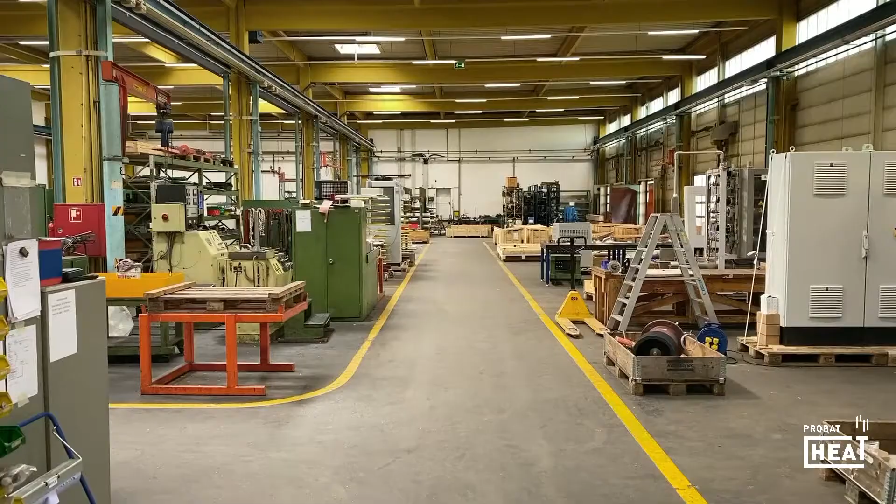This year we are going to talk about our main topics like sustainability and digitalization, but of course topics that drive the coffee world. For example, the power of grinding. Therefore, we are today at Baumeister in Hamburg-Norderstedt, which is a member of the PROBAT group and are experts in grinding technology. So, over there are Thilo and Dietmar, who are supporting during the session and are the specialists and experts, but they will introduce themselves.

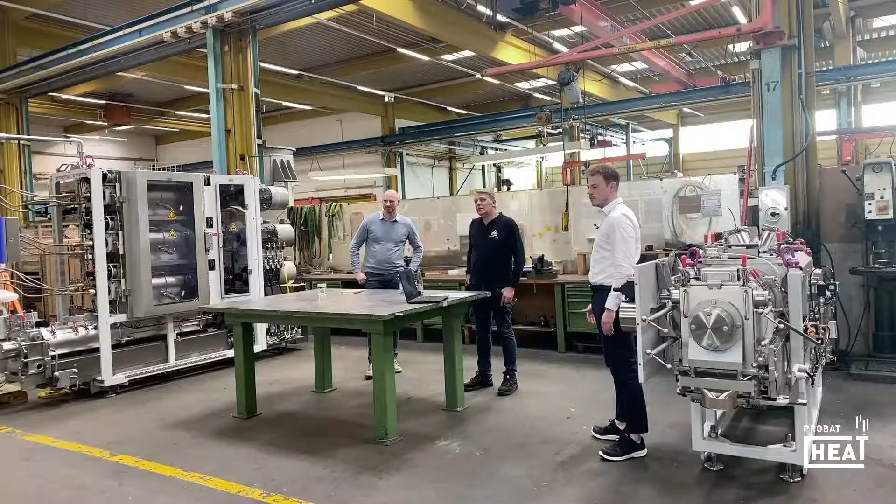Yeah, hi folks, I'm Dietmar. And I'm a member of the PROBAT R&D team in Emmerich, where we do the grinding trials together with our customers on our pilot plant. Welcome to Baumeister. My name is Thilo Lechner and I'm the Chief Design Engineer from the Roll Grinder division here in Norderstedt. It's near Hamburg. And the Baumeister company is a member of the PROBAT group since 1985, and a manufacturer of many types of grinders and mills.

And the main types of grinders and mills are, for example, the universal turbo mill used for sugar, for spices, for starch, lactose, limestone, gypsum and many more. But most are used for sugar. And furthermore, we have gap mills for products with soft and medium hard materials, used when an even finer product is required than by the turbo mill. The universal turbo mill and the gap mill are high-speed rotation mills up to 120 meters per second, and they grind by a crushing impact process.

What have we more? We have classifiers to separate the coarse and the fine particles. We have beater blade mills for products with a high fat content. We have big roll flakers for the food oil industries, for oil seeds, for example, soya beans or rapeseed, and that is necessary for the oil extraction afterwards. We have different kinds of roll grinders for products such as fertilizer urea or superabsorbent polymer, short SAP. It's a granulate to absorb moisture. You find it, for example, in diapers.

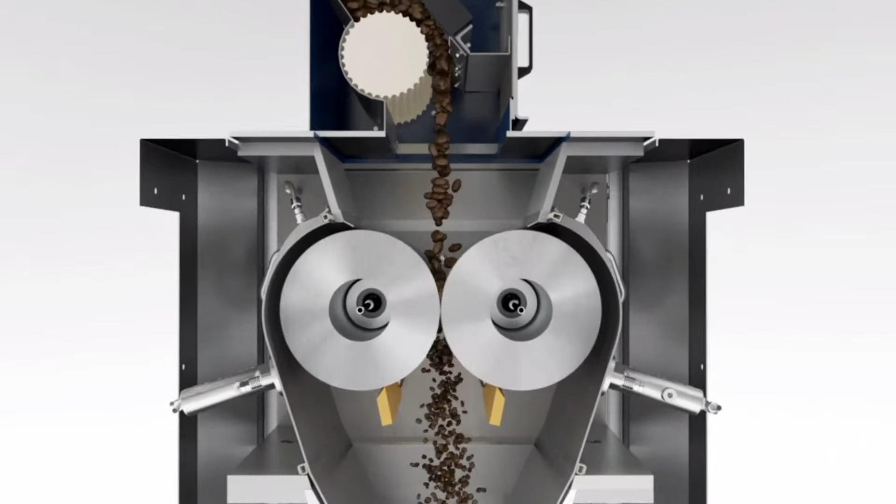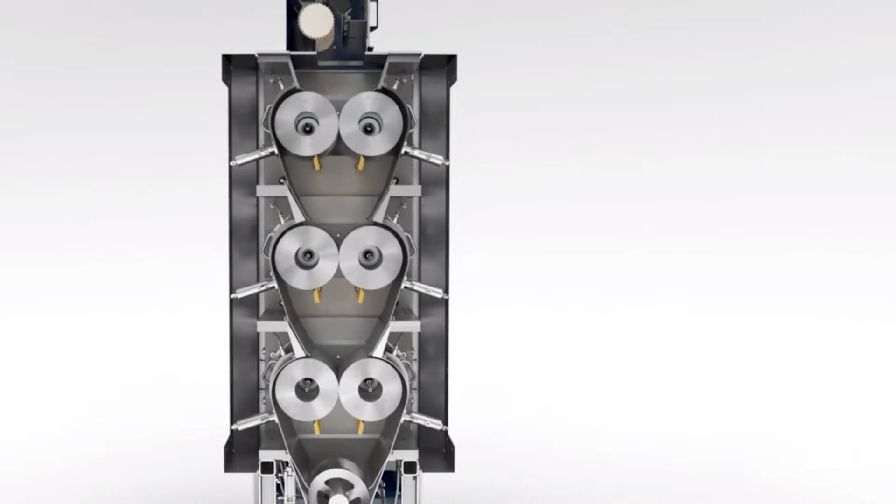Okay guys, let's have a closer look at the machine itself. So here we have a 3-stage roller grinder for coffee grinding. On the top we see the feeder where the coffee is provided to the grinder, passes the 3 different stages and finally gets out at the superfine stage. Further we will go to the drives. Let's have a closer look at that one.

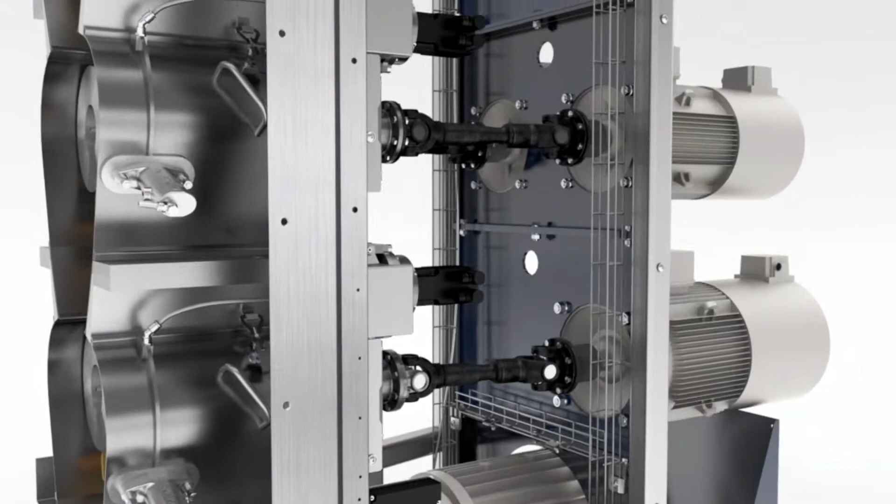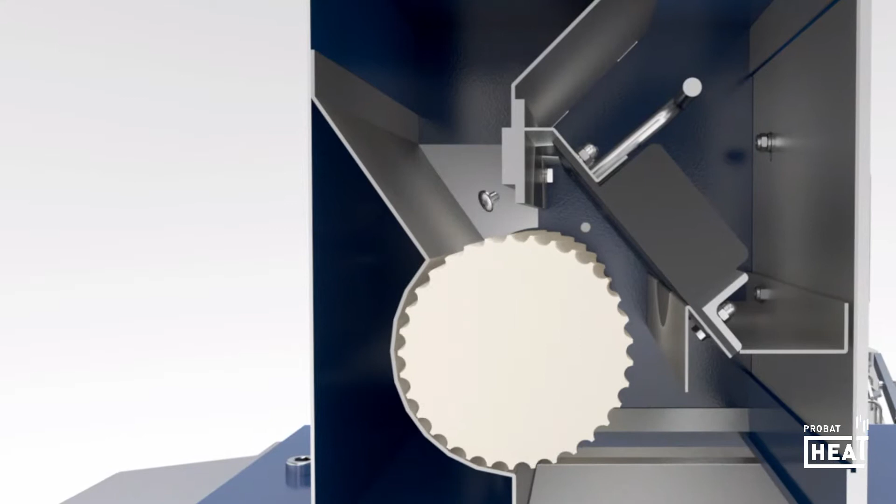There you can see that each roller can have a drive. I have to say can, because the drive configuration depends on the customer's needs. So you can have 1 drive per roll, or you can have 1 drive per section, and then the transmission is with sprockets. Furthermore, as a standard for this type of grinder, we have added a magnetic separator that allows us to extract foreign particles.

Thank you, Dietmar. That was, I think, a good overview of the grinder itself and the technology behind it with the coffee. Now we would like to dive a little bit deeper into the technology. I collected some questions from the market and the customers. The first one is, a lot of roasteries are increasing their output when it comes to ground coffee, and they of course have PROBAT mills, for example. Do they have to buy a new mill if they want to increase their output, or are there any other opportunities to do that?

Well, all the grinders of PROBAT are equipped with a feeding device too. That is a star valve with a frequency-controlled drive, and that allows you to adjust the capacity. Higher speed is more capacity and so on. Certainly the maximum capacity depends on the respective grinder size, and a finer grind has a lower output than a coarser grind. In case a higher output is desired, a third stage can be a solution for a two-stage grinder. But if you are at the maximum for the grinder, then you have to integrate a bigger grinder for sure. I understand that.

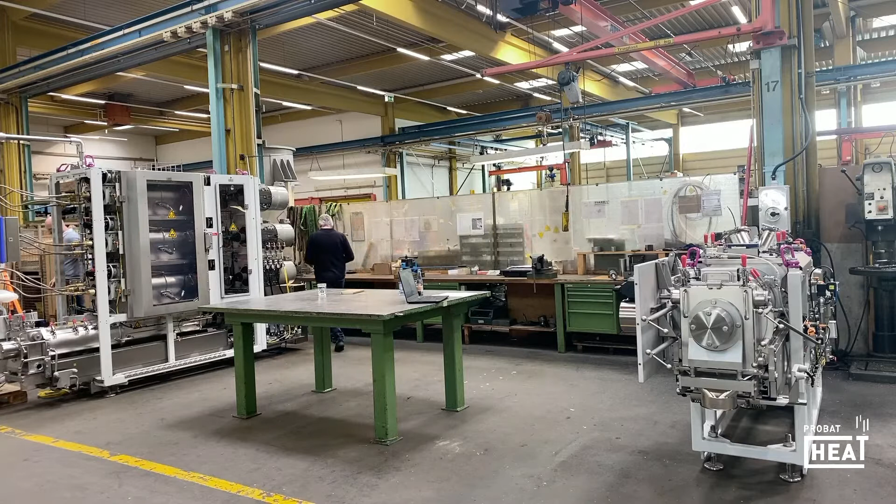Here we are. This is the grinder UW900.3. It is not fully mounted, some covers are left, but it's a very fully equipped machine. We have additional customized requests, special requests, and we want to show you some of these highlights today. The first I want to show you is in the grinder stages.

There the rolls are located, and underneath there's a scraper blade, and the scraper blades are normally there to clean the roll during running. But in this case we designed a removable scraper blade, manual, without any tools. That was not such an easy task because the scrapers must be very stable in the fixed position, and also very straight and accurate, without any play. And now I want to remove that and show you.

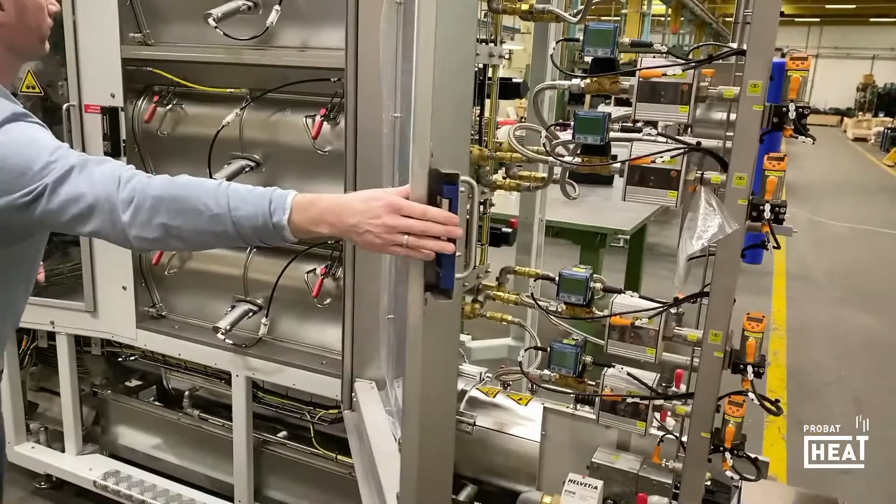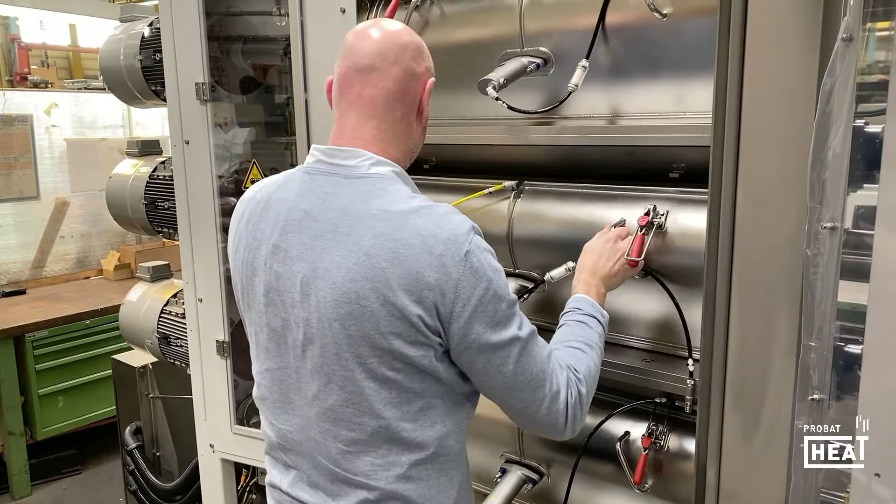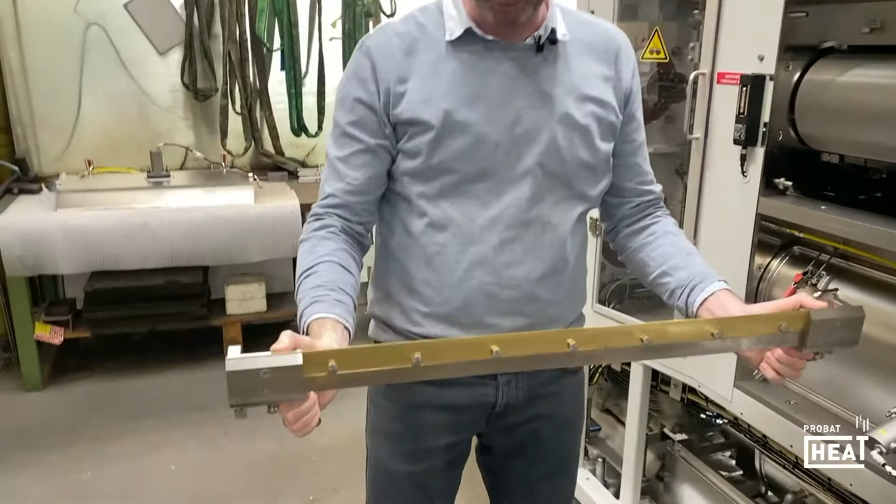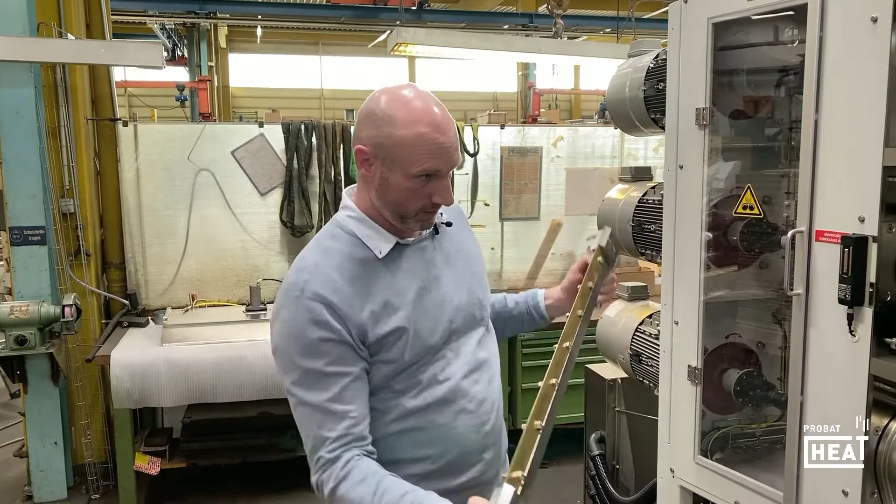First I will open one door. It's also easy without any tools, but that's not the topic I was talking about before. Underneath there are the scraper blades. Normally they are totally fixed. And then I can remove them. And here you see the knife, or the scraper blade. It's easy to handle. Very easy. And that is made for the cleaning process. It makes the cleaning process more comfortable because there are no spaces behind and it's easier to access.

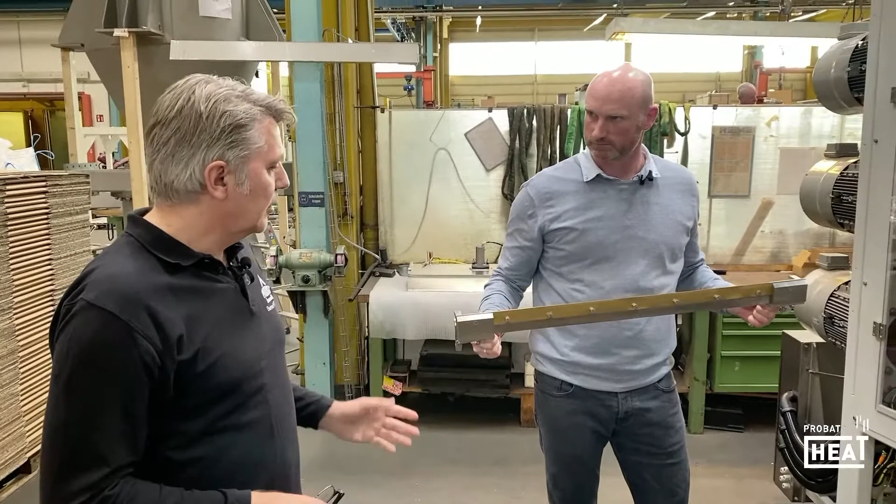Let me ask you one question. If you do that extraction very easily and quickly to clean, then you have to readjust the blade, I think? No. Not? Really? It is a totally fixed position without any play. You don't need to readjust it. It's an eccentric clamp. No readjusting. Oh, okay, that's pretty cool. It finds its totally accurate position back. Okay, wow. Impressive.

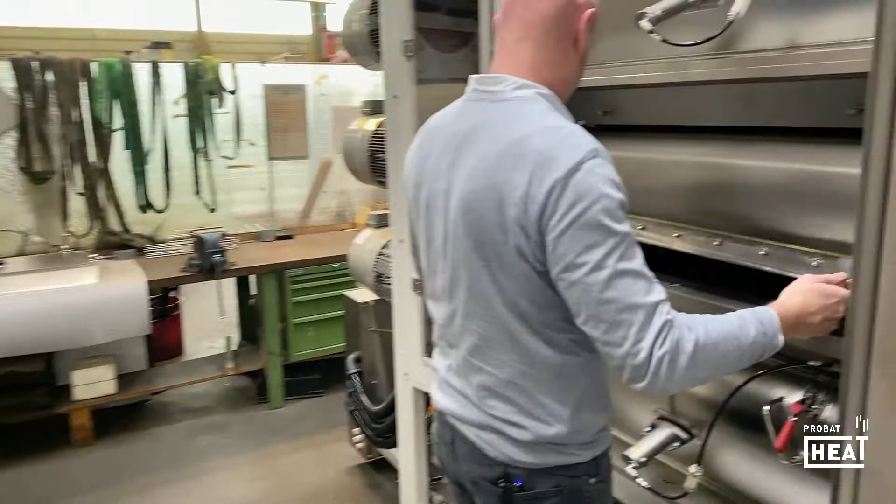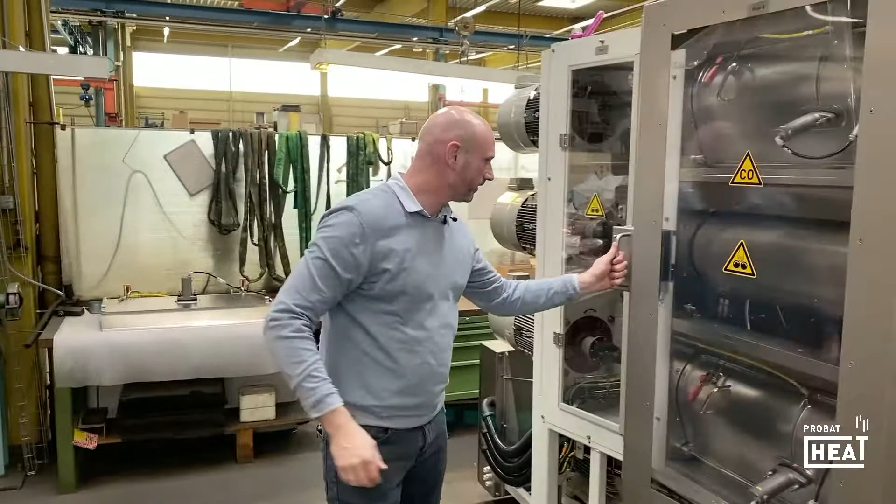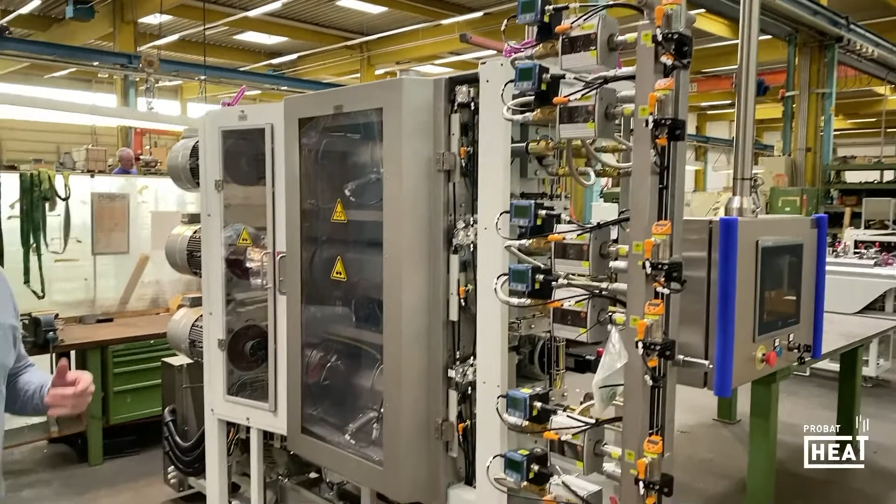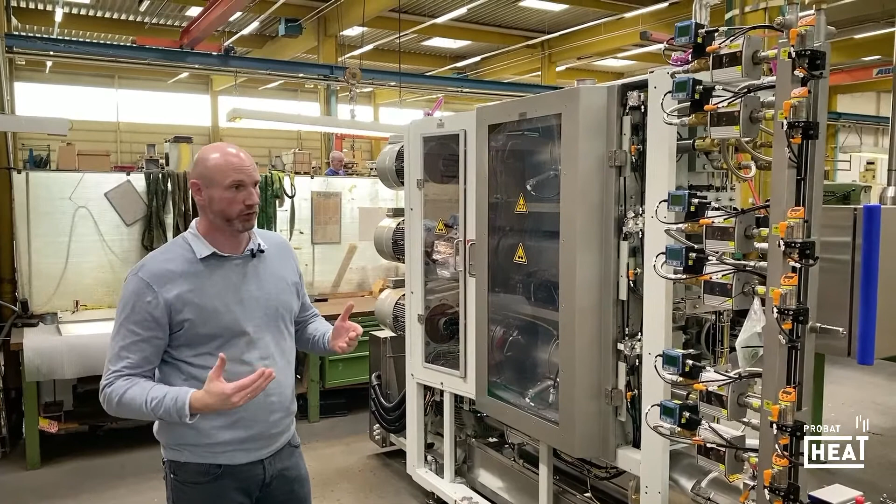Okay, the door closed. Come to the next, to the water cooling. Water cooling is for the rolls. That was about to separate the measurement, the water flow measurement, adjustment, as well as temperature recording for each individual roller. It was customer wish. Normally, standard was each stage, manually adjusted, and not electrical, and not each roll.

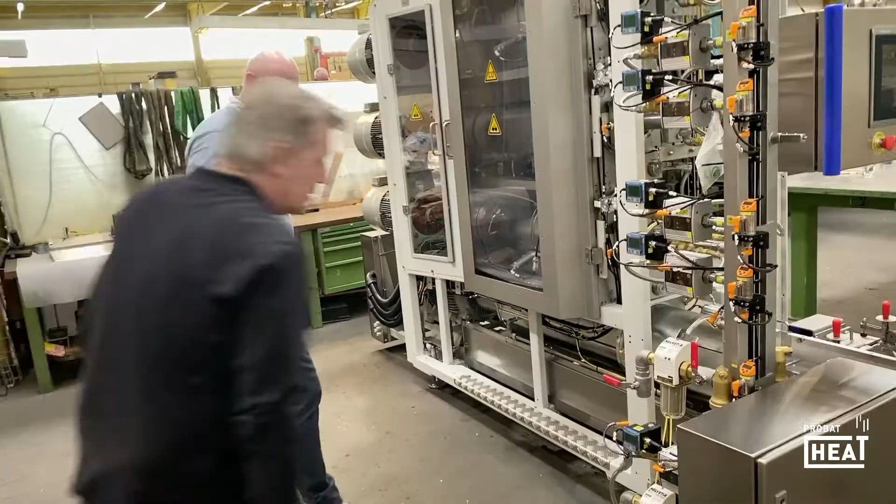It is an independent flow. So very special, let's say. Yeah, you see, it is very extensive equipment. High-end control. Cleaning the filter, you can do it during the run, during operation. You close the valves here and here, and then it flows to the bypass, and you can clean the filter without stopping the machine or the plant.

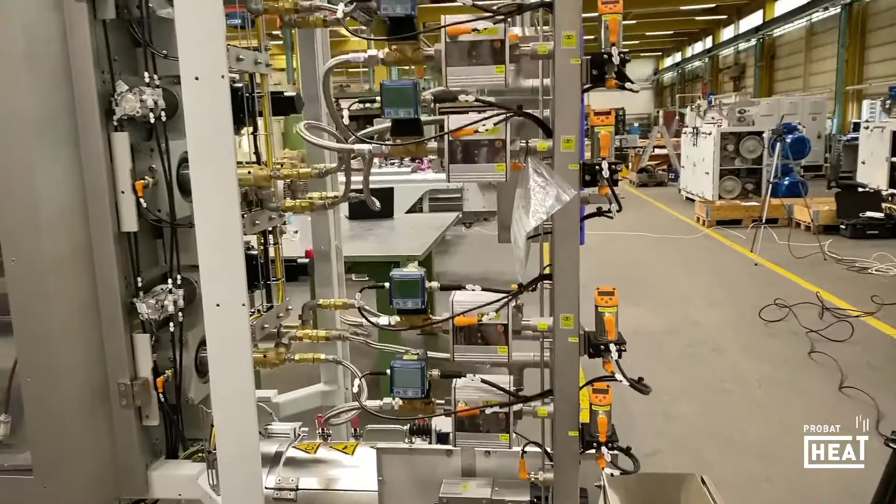Or the production. Great. What do you say if a customer asks me, is it a must-have, or what is the benefit for the customer? It's additional. The cooling of the rolls. The important thing is they are not cooling the coffee, it's cooling the elements, the components, for example bearings, and the inside of the rollers, and hold it stable without any thermal expansion. So it is protection for the equipment.

And in this case, the rollers have a differential speed ratio. When you switch, for example, the one is the faster roll, and you switch to the other as the faster roll, you can adjust the water flow more and less, accordingly to the speed of the rollers itself. And everything can be set at the controlling system or connected maybe to the recipe if it is necessary. So more monitoring and adjustments, a little customized tuning.

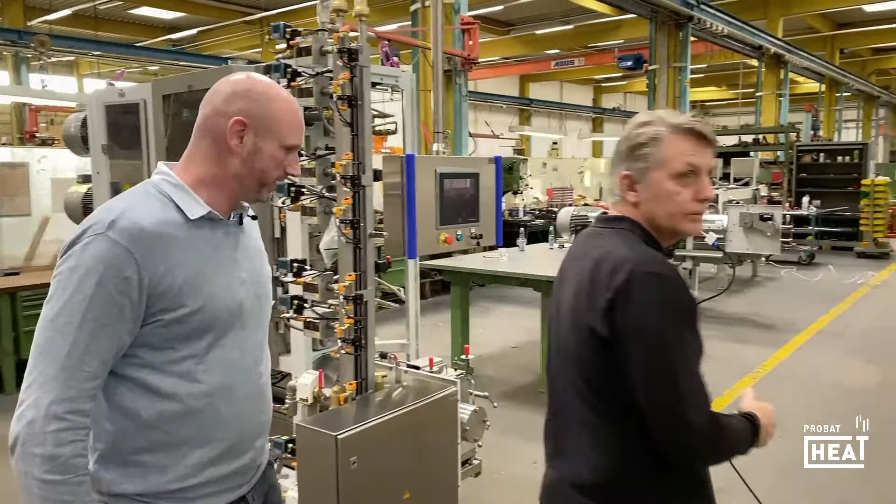Okay, very good. Okay, cool. Let's move over to the next. I want to show you something. Can you take it away? We come to the densifier. Sorry. Yeah. The densifier.

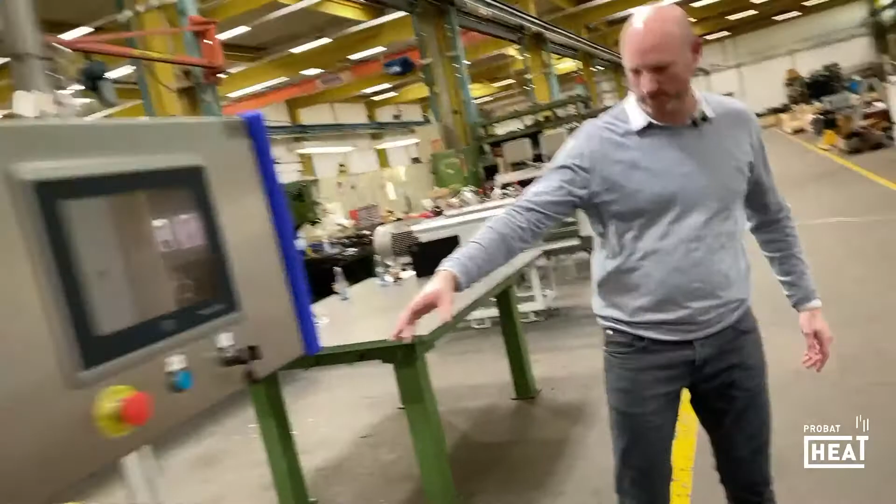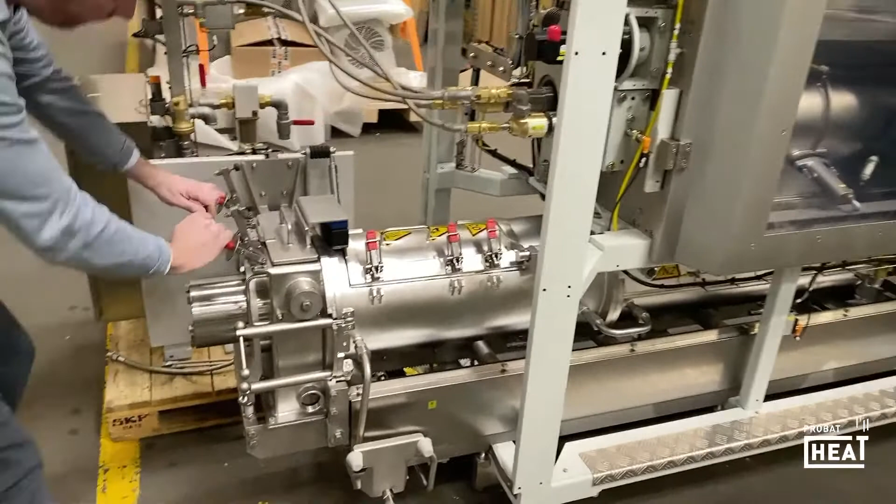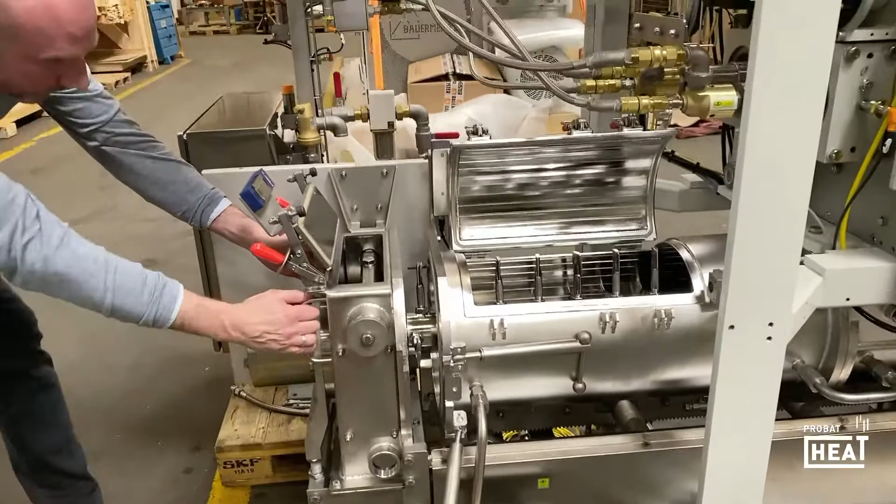Yeah, I like this one. I want to have it in Emmerich, in your R&D center. Can I take it? Yeah, you have a smaller grinder there. No problem. We can cut it out.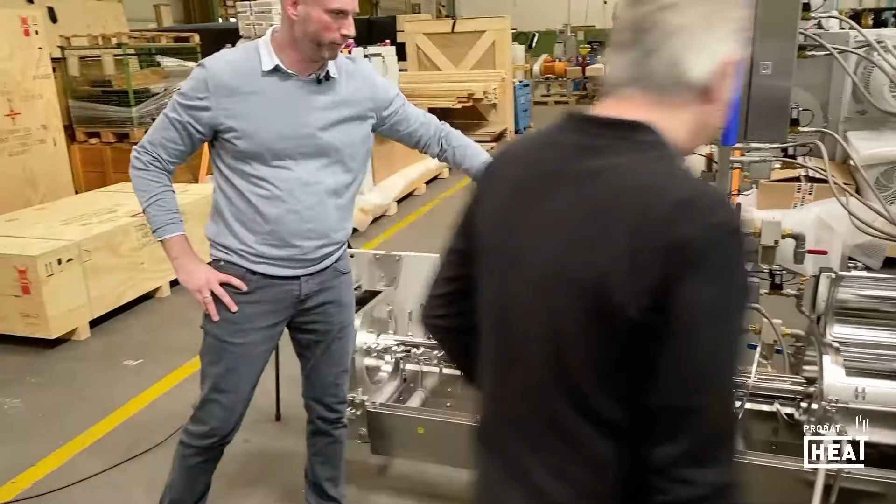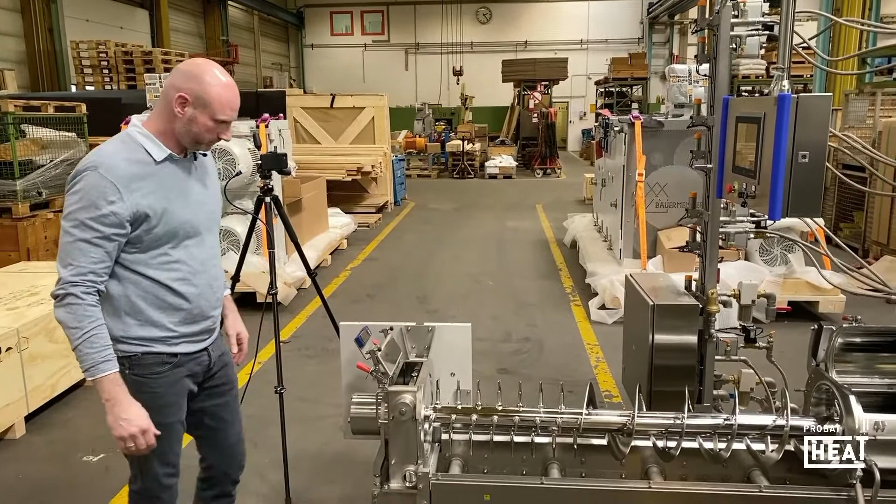That was very special, and it's easier to clean the internal rooms. Otherwise, you have to vacuum it here and here and here. It's possible, but this is a more comfortable thing. And is it adjustable afterwards, or is it only possible with a new grinder? It's just for a new grinder. It must be designed directly to the combination. It's not a retrofit.

Yeah, maybe. We have done it for one retrofit, another kind of grinder. I remember one thing. So it is possible. That is good news. But not for the total big grinder. It's limited to the 900 length. 900 length rolls, 900 millimeter.

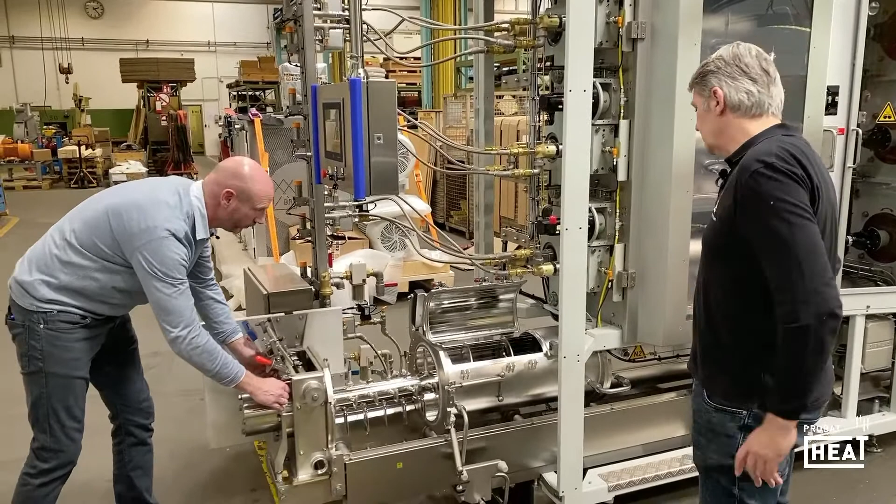So you only push it back. You don't have to readjust anything else, the alignment of the shafts? No, it's no problem. Pretty cool. Connection here. Okay, I see. Great.

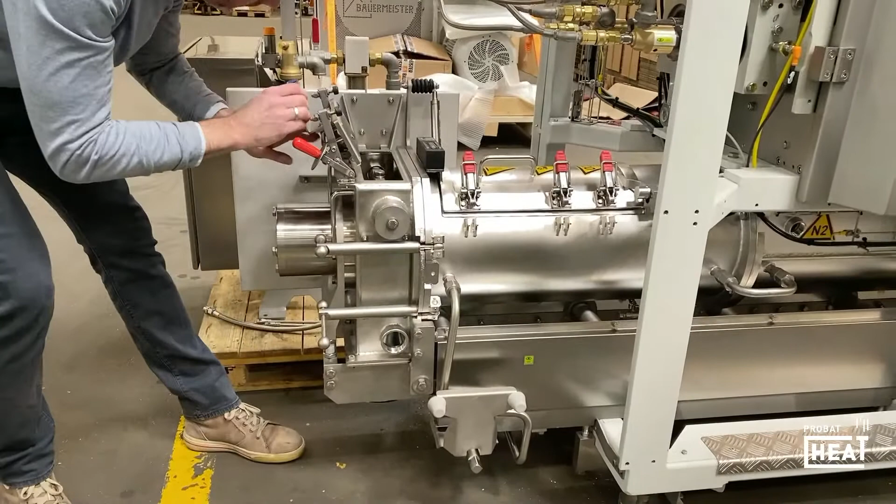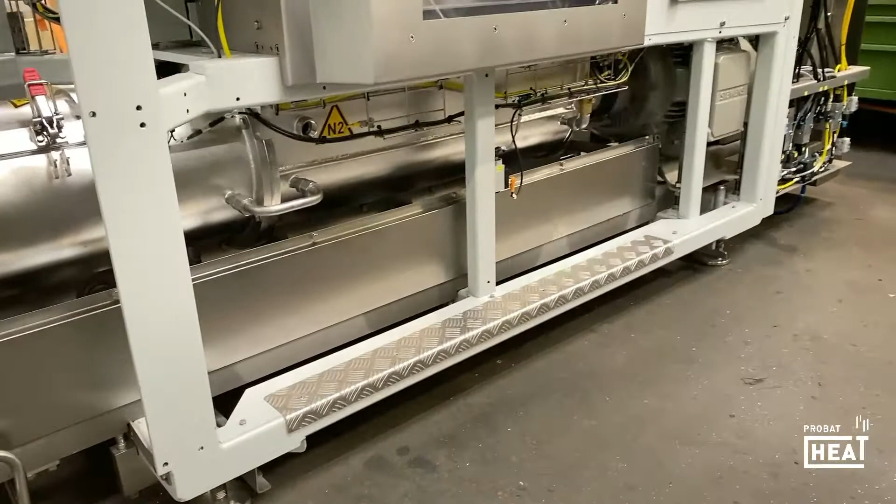And here more clamps. Thilo, by the way, what is this for? Ah, I see, nitrogen. So you can purge the turbo channel with nitrogen. You have additionally a good customized atmosphere for the aroma, for the aroma safety. Okay, cool. Great, the three highlights.

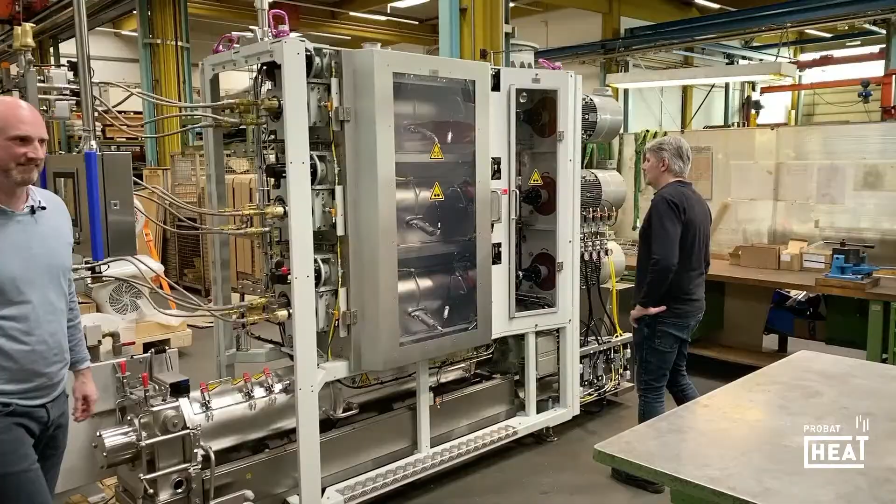Thank you, Thilo and Dietmar. That was very interesting for me, and I hope also for you.

Another advantage, what we learned from the market, is that the roller exchange is very fast and easy when it comes to, I forgot the word, maintenance points. And therefore, we created a video clip which shows how easy and how fast it is. Of course, the technician who does it is experienced, but look at the video and enjoy.